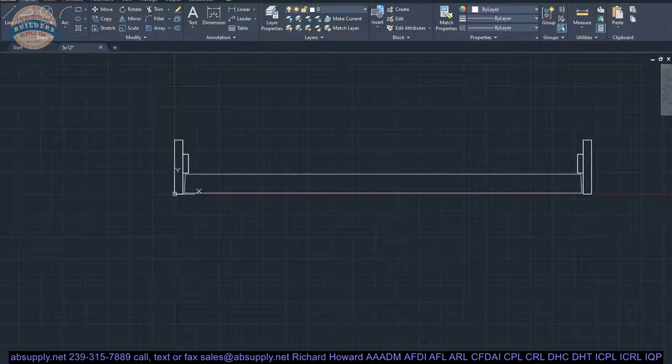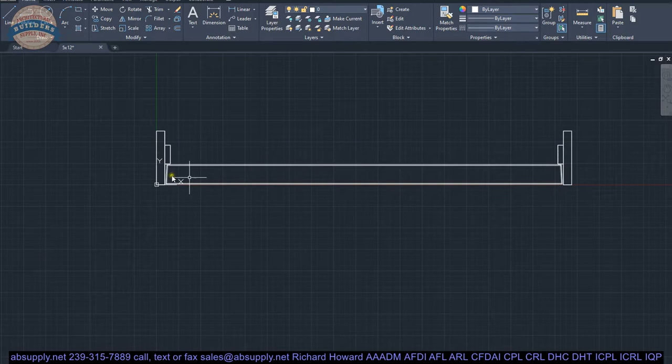This video will illustrate the effect a 12-inch wide hinge has on the margin required on the lock stile or strike jamb of the door. Right now what I have drawn here is a 3/0 door. It's 35 3/4 net width. It's 1 3/4 wide. It has a 3-degree bevel on either side. It has an inset of a typical 3/32 of an inch over here.

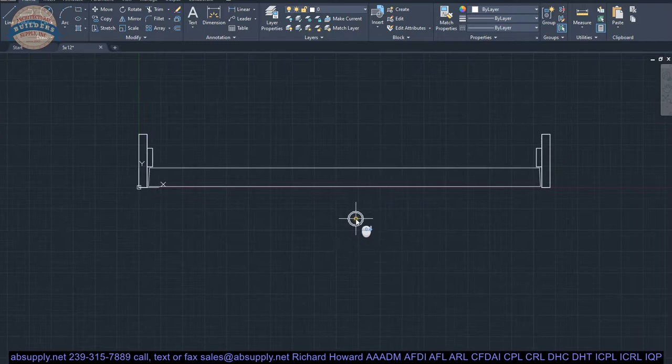Okay, so the inside jamb width is 36 inch because I have 1/8 of an inch on either side. Now let's rotate our door around a pivot point that would mimic a 12-inch wide hinge. So we're going to rotate, select our objects, and I happen to already know what my pivot point needs to be because I've done the calculation. I've done the calculation based on my origin point is what I'm driving at.

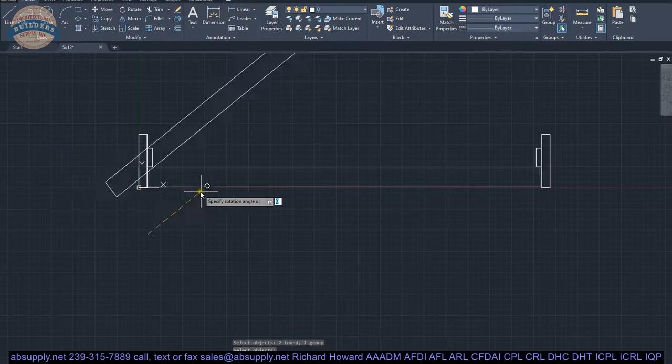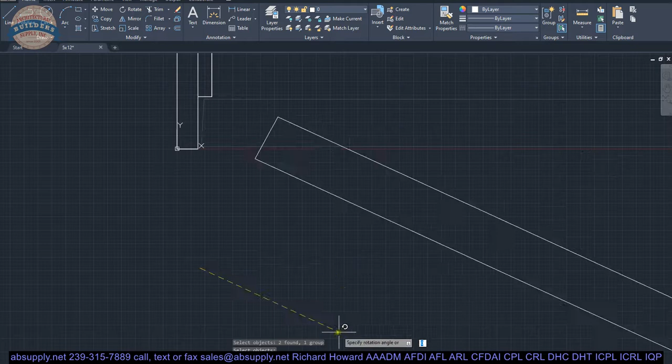So here's the door when it's in the closed position, and this point right here is my 12-inch wide pivot point. Now you'll take note that when I rotate it over here, there's no trouble on the hinge side at all. You know, 1/8 of an inch, beveled, not beveled. I mean, it's a good idea to have it beveled, but nothing's affected on the hinge side.

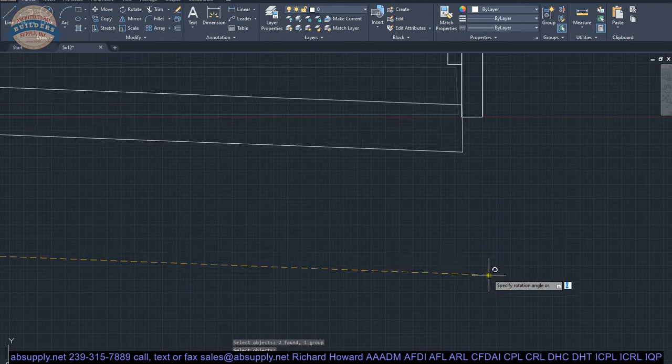But when we get over to the strike jamb, that's when we're going to have trouble. So what we have here is the door in the closed position. As we rotate that open, you can see that we're going to have conflict right there. So we have a problem, and that problem is going to be how much overlay we have happening there, meaning how too wide is the door, or that bevel that's on the door is 3-degree.

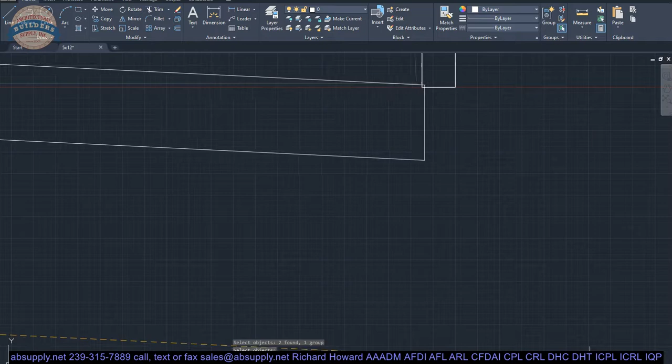Can you correct this by putting a more aggressive bevel on the door? Well, you can mechanically, but you can't from a hardware perspective because your hardware won't be prepped to be compatible with a 6-degree bevel, something of that nature. So the bottom line is, when you're dealing with a 12-inch wide hinge, you're going to need to accommodate the fact that you have a door that's going to need to be made smaller. So be mindful of that.

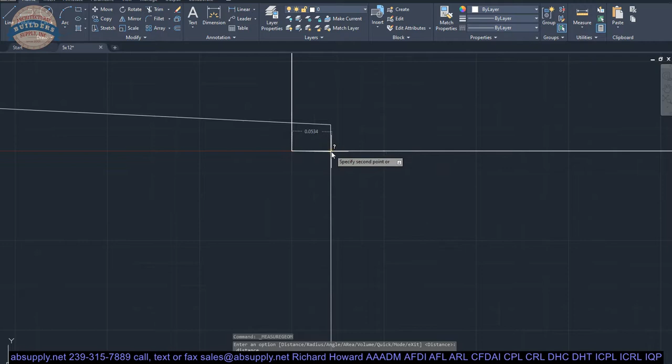So we'll lock that in there, and let's put a measurement on this. We're going to go from basically here to here. That dimension is 0.05 inch. So it's almost a 1/16 of an inch. So your door is going to have a minimum margin of 3/16 just to clear technically, but you'd really need a 1/4 inch on the strike side for that to work.

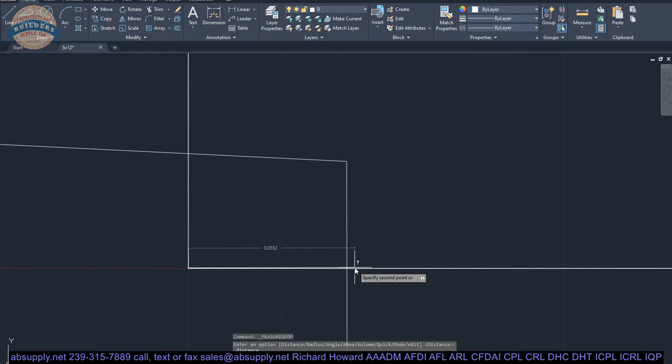Okay, so be mindful when you're using a wide hinge like this that you're going to need some extra room to accommodate that very large pivot point. Now, a 10-inch wide hinge won't give you the same trouble. An 8-inch wide hinge won't give you the same trouble either, but be mindful that you'll have to make some sort of accommodation. If you have any questions on this, please feel free to reach out to us.